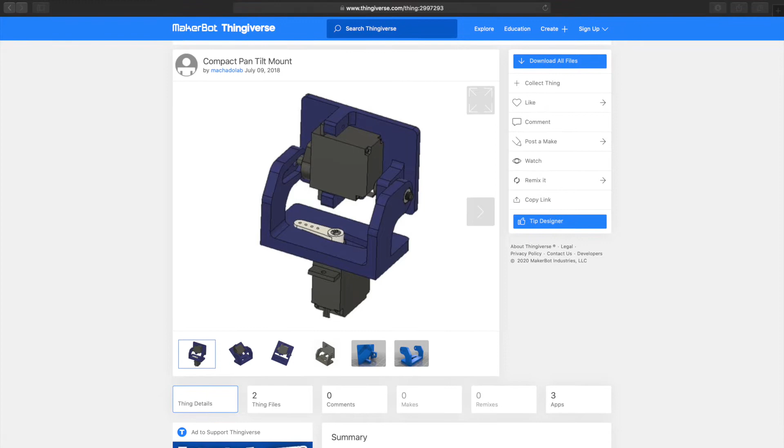I did a lot of searching through the Thingiverse database, and I found this particular design that I really liked. It's just two pieces, and the servos mount directly to the pieces without the need of a lot of extra hardware, just one other screw needed to stabilize the motion of the tilt.

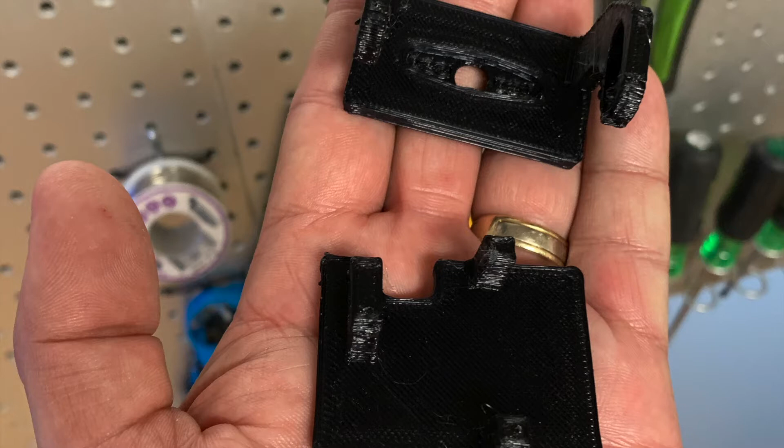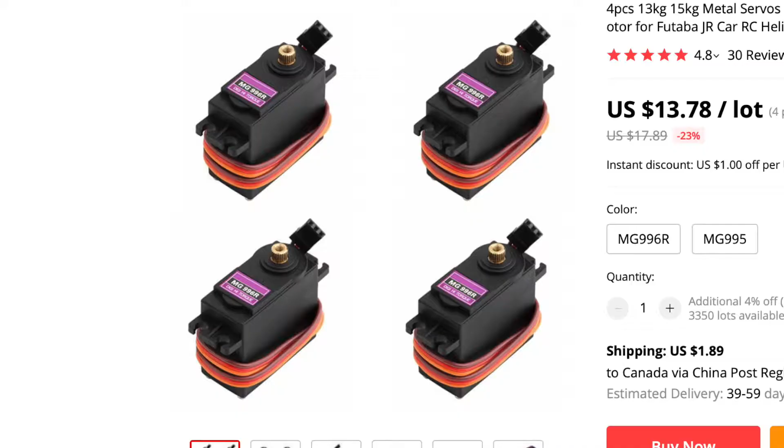And so I did print out that model and found that it's very, very tiny. Both pieces together fit inside the palm of my hand, and they use the smallest possible servo, which I was concerned wouldn't be enough for the weight and torque requirements of the camera. Instead, I wanted to use these larger servos.

These are MG996Rs. I'll include a link in the description, and they were quite a bit bigger. Of course, I couldn't just scale them because they're not proportional with the smaller servos. I couldn't just scale them by making the pieces bigger, and so I needed to remodel based on the design that I found on Thingiverse.

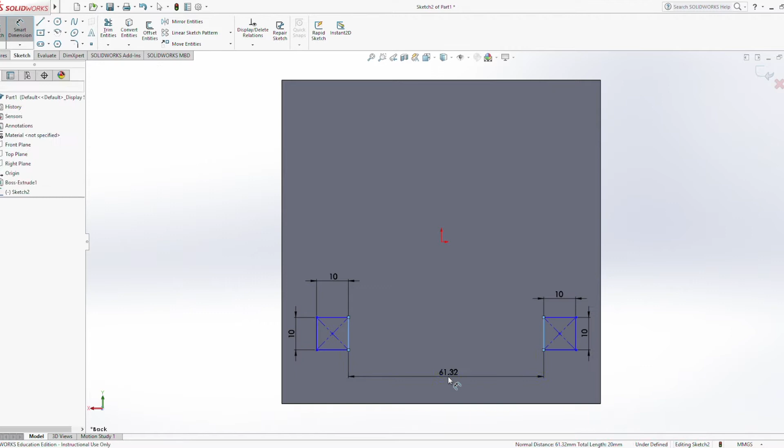I used SolidWorks to model the design, and I started with the top plate, which is going to be where the camera mounts directly. This is the underside of the plate, and I decided to make the plate about 100 millimeters square, and then following the same kind of design as that original, created the mounting posts so that the servo can mount directly to that.

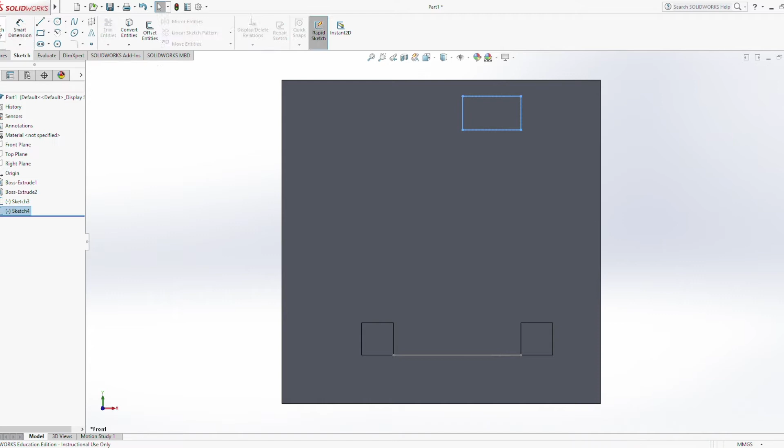Now I already had the servos at this point, so I used my calipers and measured the basic size of them. But I also did find the same servo already modeled online, and I was able to download that and import it into SolidWorks in order to use the dimensions from the model.

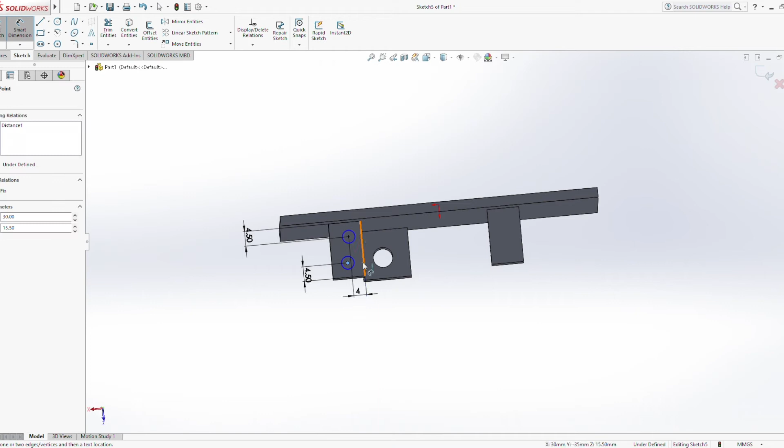Now, when I first started out, having not used SolidWorks a whole lot, I just went back and forth between the windows for the servo model and my own model. But later I found it's actually much easier to use the assembly window to put both the models on the same screen and then use them directly instead.

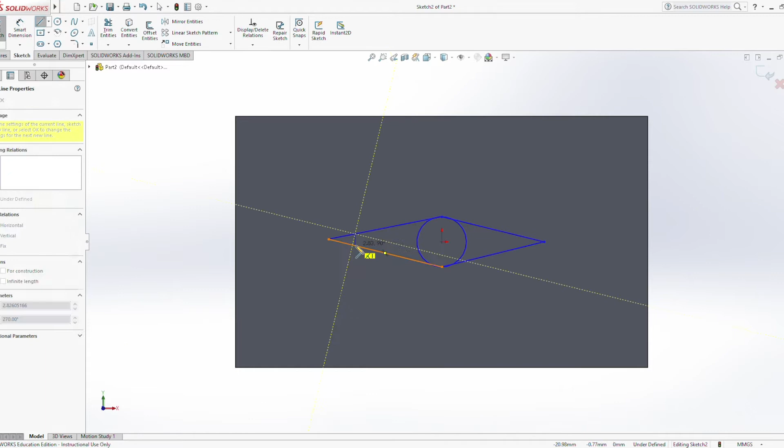Once I had the top plate all dimensioned out and created, I shifted my focus to the bottom, and this is going to be where the side rails are, as well as the swivel for the pan action. Now, I started by modeling the hole here for how I wanted the servo horn to fit in there.

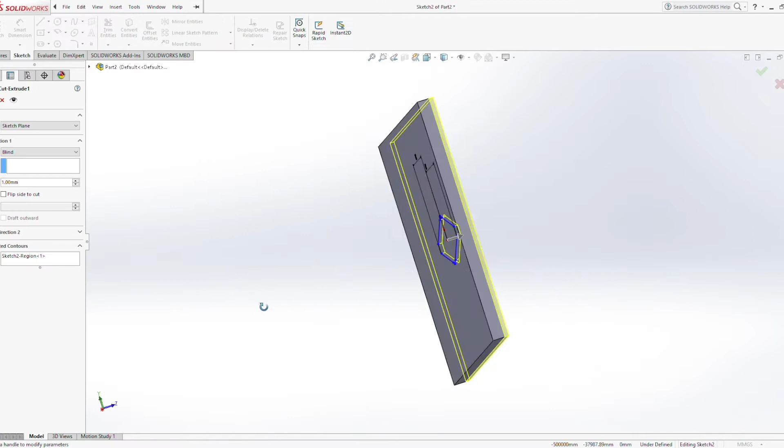I thought I would use the similar type design like they did in the original model, but I found that after playing with it quite a bit, I couldn't get the horn dimensions exactly that I wanted. And then I also found that there's a perfect nice round circle horn instead. After I spent all the time creating these longer arms, I instead created a model that used the round horn, which was much easier to dimension and make sure it was all correct.

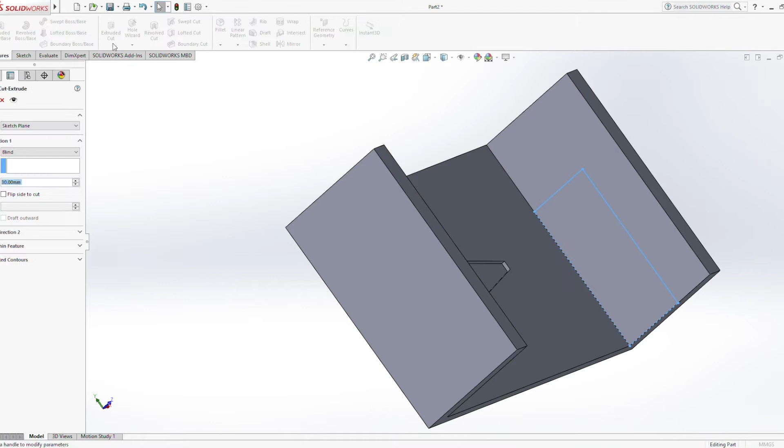On this screen recording, you can see I left it here as I go on to the rest of the model, but at the very end you can see that I did switch to that rounder horn instead. Now I'm creating those side rails or arms that are going to connect to the top plate and just designing them in such a way that the overhang as I 3D print them will be tolerable and it won't create any issues.

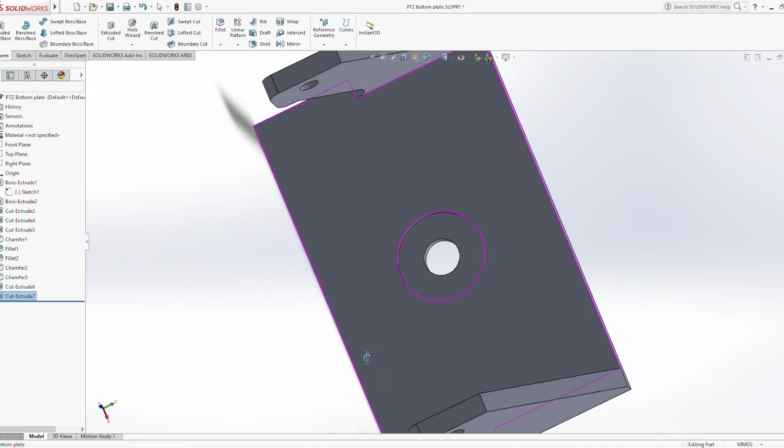As you can see, when I'm done, here's what it looks like with that horn being round instead of just the arms sticking out, and the whole model does work pretty well and fits really well with the top plate. Those being done, I sent them to the 3D printer, and a few hours later I had both the components and they fit really well together.

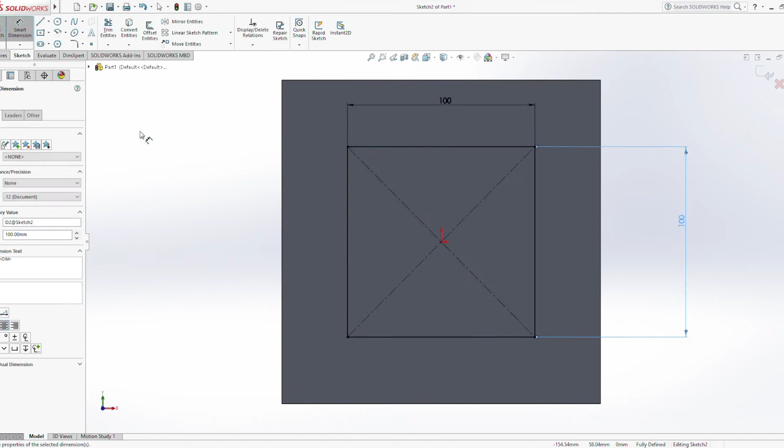Now as I shift my focus to the final piece, which is the base of the whole thing, I made great use at the beginning here of using the chamfer tool to create the angle so that it steps up in a bit of a pyramid and gives me the nice mounting base that I can secure for mounting the whole contraption, but also tapers to the size that I want, which is 100 millimeters square. And then I cut out the space that I need for the servo.

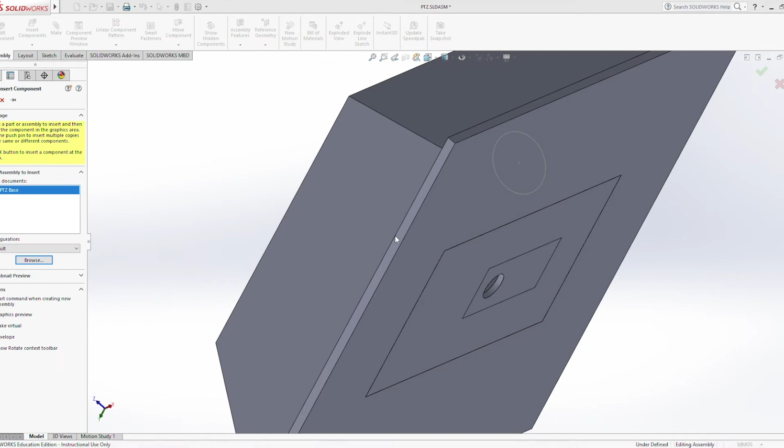Here's where I combined all of the components into an assembly, and you can see here once I did that, I was able to import both servos, the top plate, the bottom plate, and the base, and then create those relationships so that I could see how they all fit together and make sure that all the dimensions work properly.

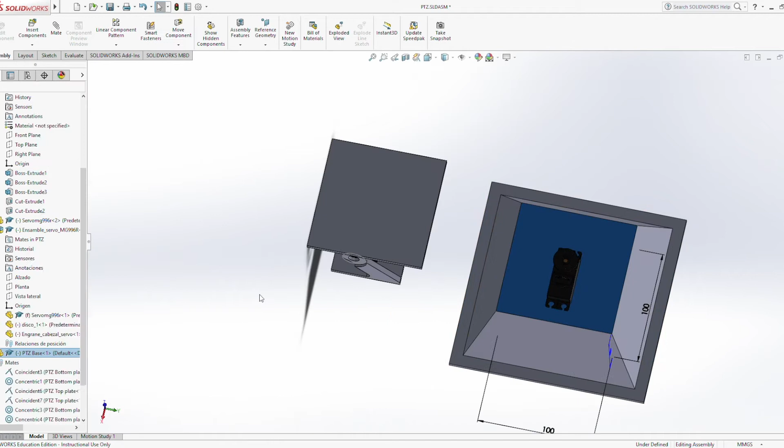The beautiful thing with this option is that you can edit the components individually from within the assembly window, which means that if the fit is not quite right, you can just double click, change up the dimensions on the sketch, and then rebuild the sketch so that all of the dimensions take effect and you can now work with those new and improved dimensions. When you go to save it, you just click the save command as you always would, and it asks you if you want to save all of the changes to those individual components as well.

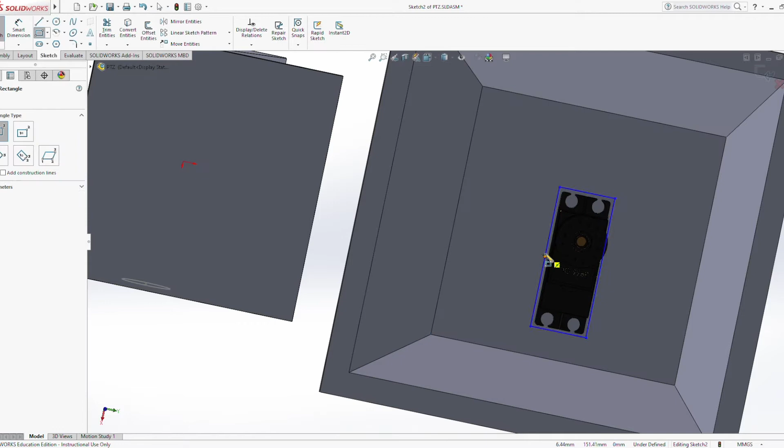This makes interactivity between the parts so much easier, and from now on when I design, especially when using more than one component or where I can find a model of a piece of electronics equipment, I'm going to definitely use this because it makes the process so much easier with much less switching between windows and also a much better fit in the end.

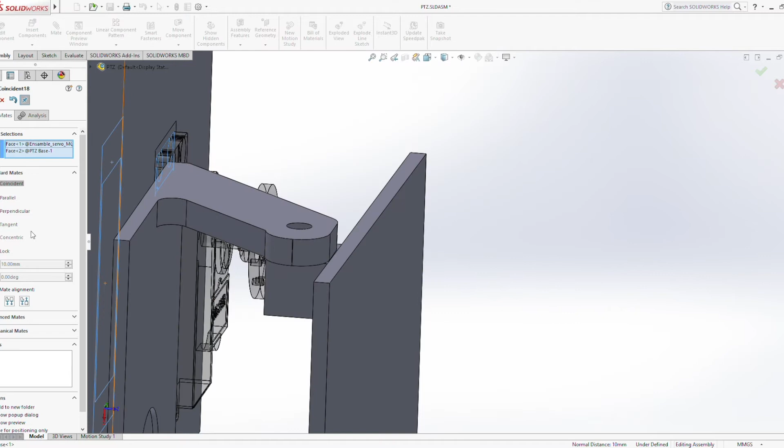Often if I'd try something like this from scratch, I would have to print out multiple copies of the model and keep tweaking it in order to get it right. But after I modeled all of this and made sure that it fit perfectly within the assembly screen, I was able to print it just one time and it all fit great together.

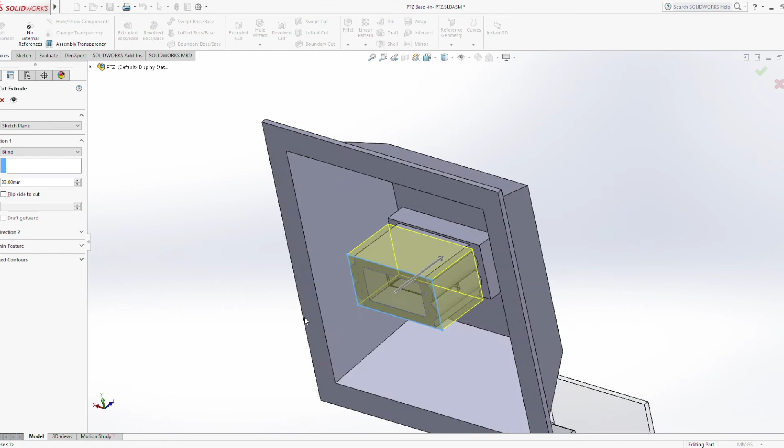Once I have everything cut out and lined up, I'm going to shell the inside of that base so that it leaves room to install the rest of the components and uses less material. And then I'm just simply going to fit it all together with relationships here to make sure that the center of the shaft lines up with the center of the hole on the next component and so on, so that we can establish the relationships for swiveling and make sure that they all work well.

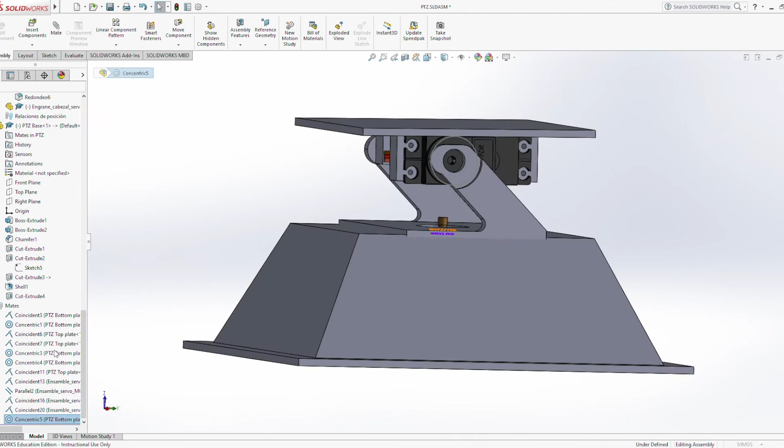As you can see here, once I have it set up, I have everything aligned so that if I were to move this base independently, it will actually swivel and maintain its position with the next component. And the way that I have the relationship defined, it does show that it can move up and down. Of course, the final model won't, but it gives you an idea that everything is lined up as it should.

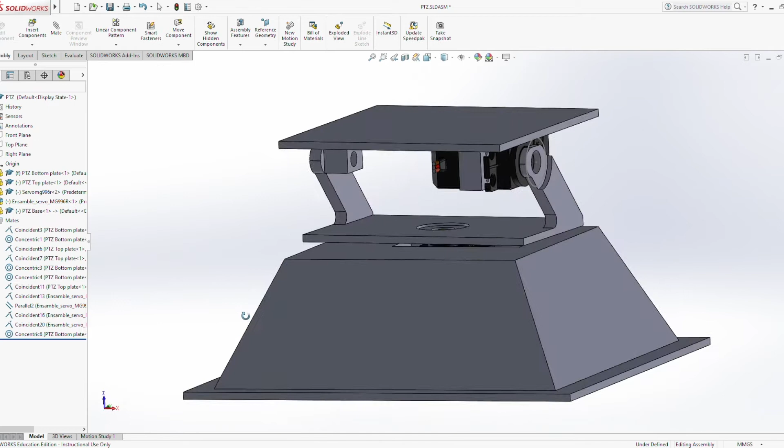Here's how the tilt is going to work, with the shaft of the servo and the screw on the other side going to hold it in place. And there's two components, both the pan and the tilt. It gives you the full description. You can test out if they're going to collide anywhere and make your adjustments as you need to, and it works great.

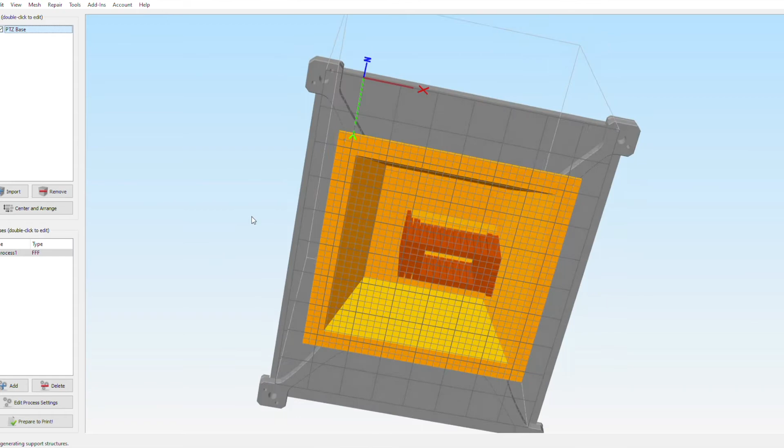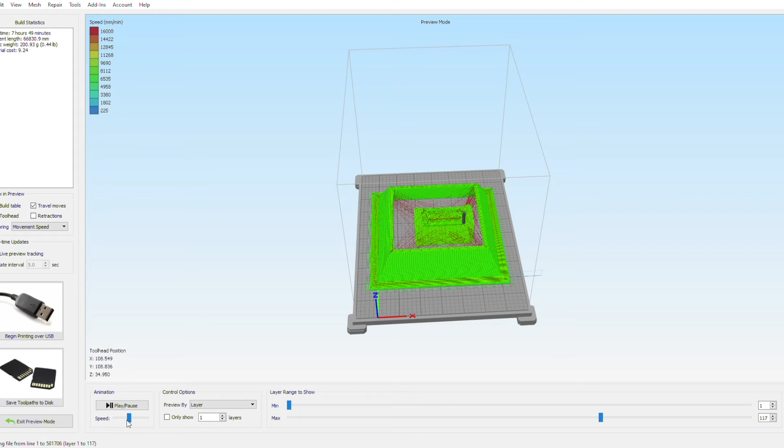I had to do something a little bit unusual for me as I did the base because it's hollow inside. It did require some support, which you can see in the darker orange color underneath, and that support is going to print so that the outer hole or the frame for that recessed servo is going to work just fine. I recessed the servo so that the top of it would be almost flush with the top of the base, which means that my components are going to fit closely together and will swivel with a lot of support for the model below. I printed that out. It took about 8 hours for the base, but it turned out great.

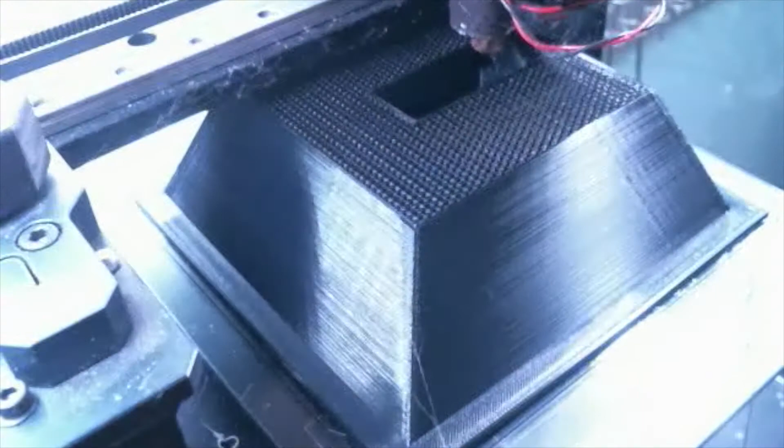Even without the support over the whole top, there's very little droop on the inside, as you can see here. There is a little bit on that first layer, but overall the support did its job perfectly. All the shapes and contours are visible, and the top surface of the base was perfect.

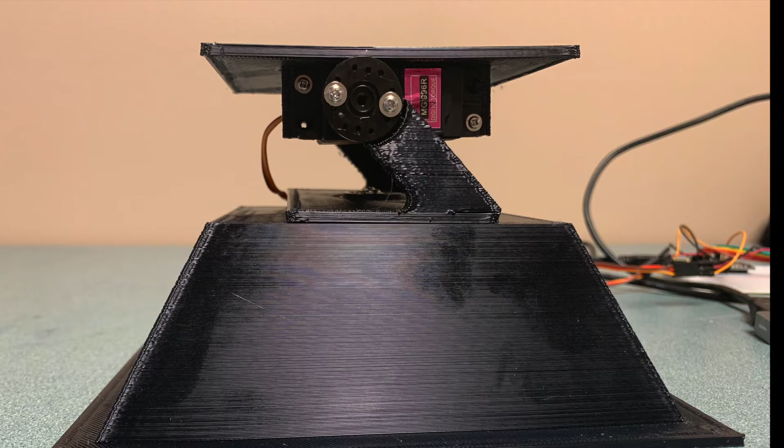I'm not going to show the assembly. It was pretty simple, but as you can see here, the servo shaft is holding one side of that tilt axis and secured with the horn, and the other side is secured by a simple machine screw and nut with some washers in between to reduce friction on the joint, and that's going to hold that axis for you.

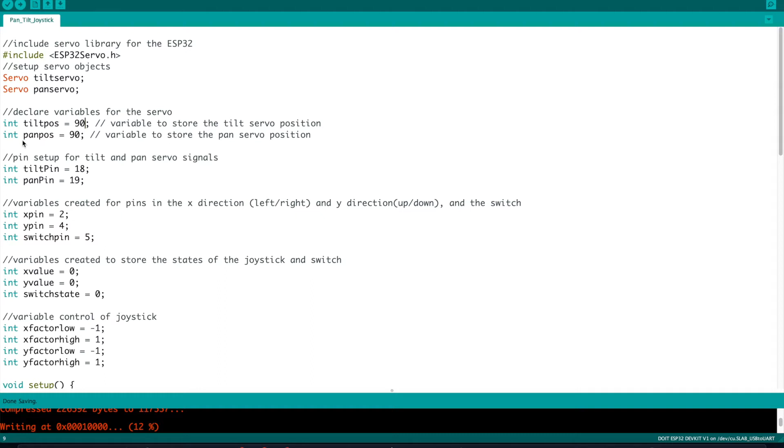The code is similar to what I've done before. If you've checked out the video on servo or joystick controls, we need to import that ESP32 servo library and then set two servo objects, a tilt servo and a pan servo instead of just the one we did before. And then I'm going to create some variables for the position of the tilt and the pan, and then declare the pins for the tilt and the pan.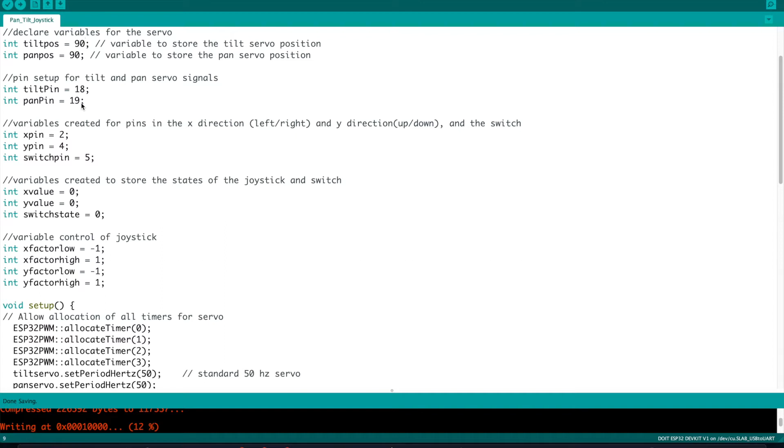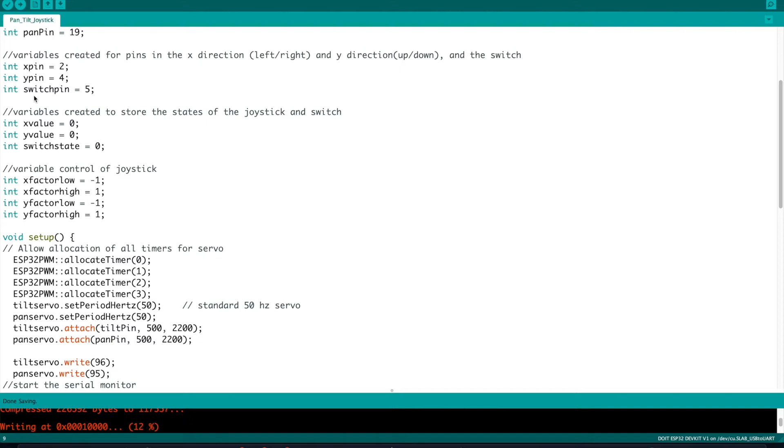In this case, I'm using pin 18 for the tilt, pin 19 for the pan, and 2, 4, and 5 for the joystick. As you can see here, the x-axis, the y-axis, and the switch. If you push down on the joystick, it does have a button or a momentary switch, and so that's defined there on pin 5. I need a variable to store the value of the x and y-axis, as well as the state of the button, so I declared those there.

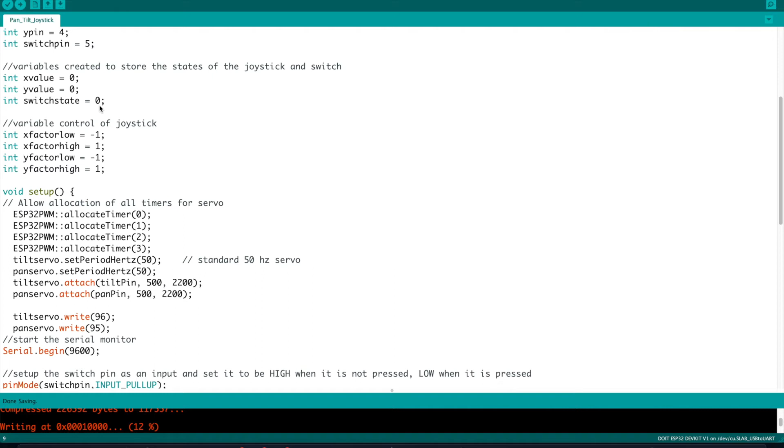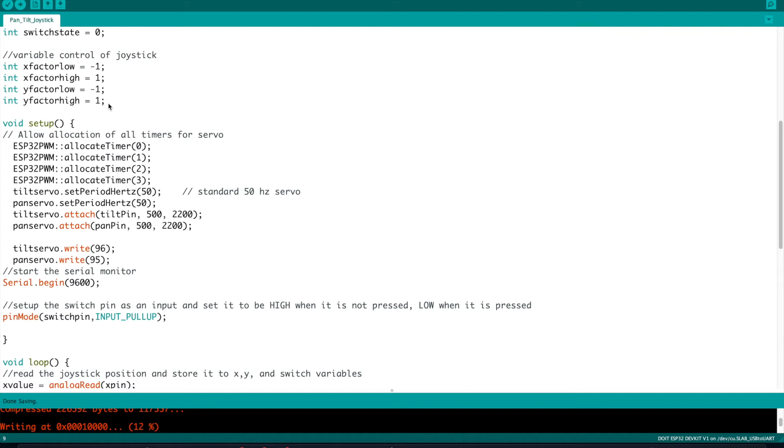And then finally, I have 4 more variables which hold a scaling factor that I use to multiply by how many degrees I want to change. So if I would like the joystick to have variable control, that's how I accomplish that there. These default timers are built in as part of the example. It's to set up the PWM or pulse width modulation, and the frequency is 50 Hertz, which is the basic standard for these types of servos.

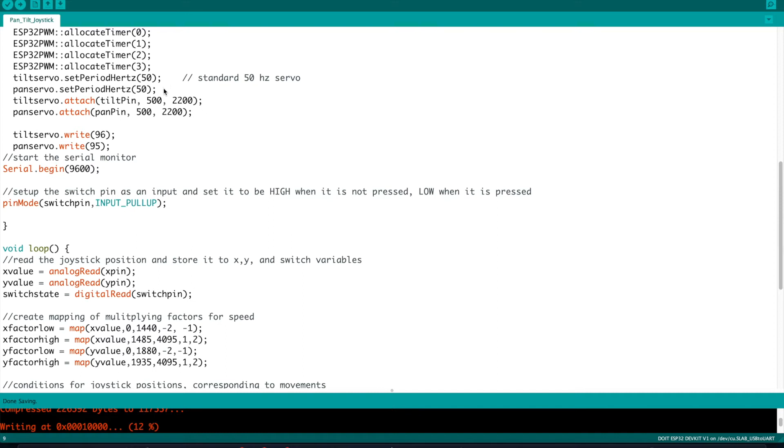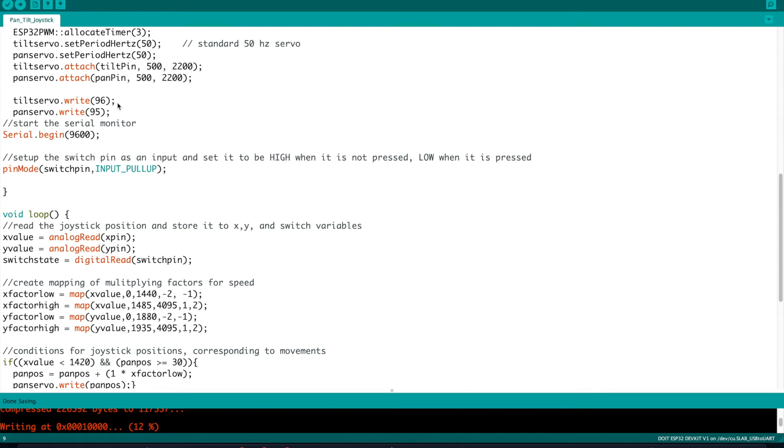I need to attach those servos to the particular pins and set the minimum and maximum PWM frequencies, and then I need to use the write command to set some default values so that under the setup function, it's going to create a default position. I originally set both of these values at 90, which is the center point of the servo, and then with them held at 90, I assembled the mechanism so that I could have everything in its midpoint.

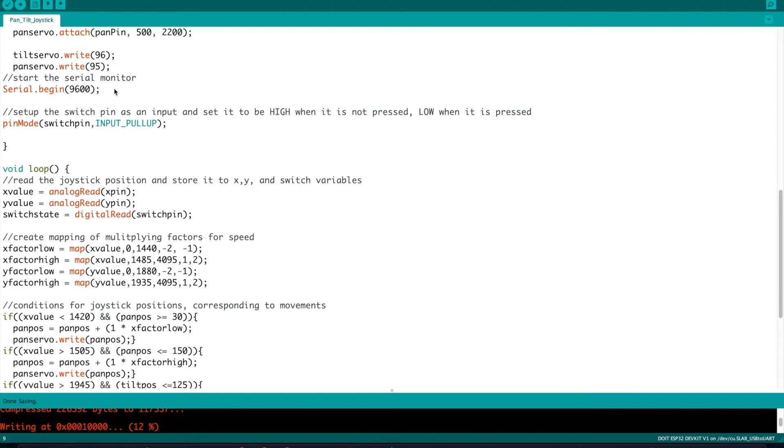I put it all together, and then when I ran it, I found out that after aligning for the shaft of the servo, they were slightly out, and so I made my adjustments to 96 and 95 respectively for the tilt and pan in order to get them completely centered where I wanted them. In the loop function, I'm going to read the X and Y values of the joystick and also whether or not that button is being pushed.

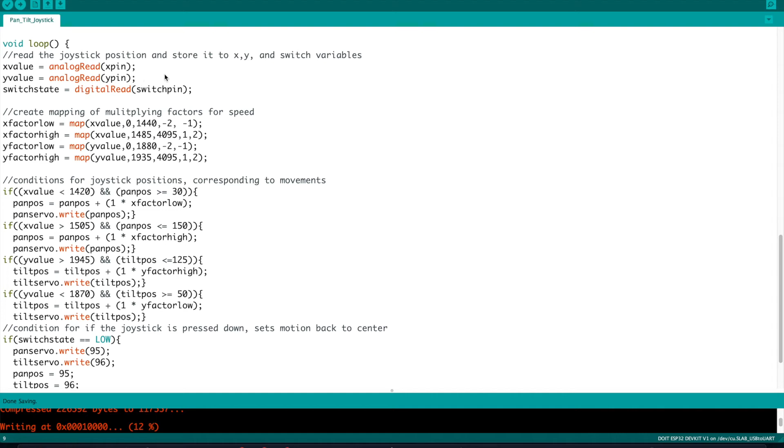And then I'm going to map all of the scaling factors here so that they work properly, increasing or decreasing the speed. And I'm just going to go slow or fast, 1 times a degree or 2 times a degree in order to have a little bit of variability, but not too much. If you watch the video that I did on joysticks, you'll see how to set up all of these parameters because you basically get values from 0 to 4095 and you need to scale them properly in order to match the position of the joystick to what signal the Arduino is recognizing.

All of those factors have been detailed in the previous video, so I'm not going to go over them here. If you need to refer to that, I'll have a link in the description below.

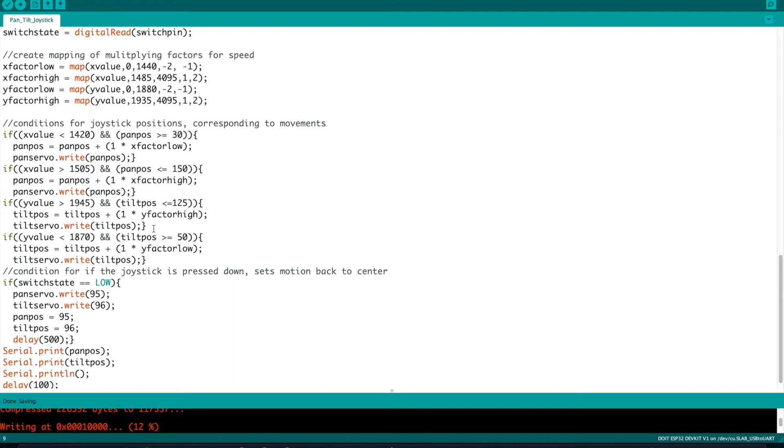Finally, I'm going to add one more condition which checks the state of the push button on the joystick. If it does detect that the button has been pushed, it's going to return the pan tilt mechanism to its default position, which should be nice and centered. I did choose to print out a few commands to the serial monitor, which helped me to determine the minimums and maximums that I wanted to use based on how much travel I wanted it to have on the pan and also the limitations for the travel on the tilt.

If you don't put those kind of limitations in, or if you don't check carefully enough, you can cause the mechanism to turn farther than it should, and you can cause damage to the 3D printed parts or the servos themselves. Finally, you can adjust the delay to get the basic speed of the movement.

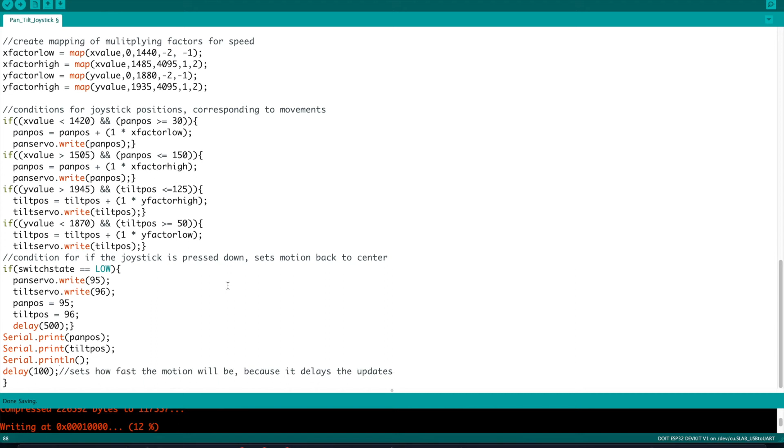If you put something as little as 15 milliseconds, you're going to get some very fast movement and a very quick response, but that's also going to look very jerky if you do hook up a camera to it. If you increase that, here I've used 100 as what I think will be a great speed. Here's what 15 looks like. It's very fast, very responsive, but you can also imagine your head spinning as you are watching the video created by this. And then, of course, if you press the joystick button, it resets the center position.

By comparison, here's what it looks like for 50 milliseconds in that delay, which is a much slower, much more controlled movement, and it feels not quite as jerky or disorienting. Once again, if you push the joystick button, it will return to the center position.

Finally, here's what 100 millisecond delay looks like. And as I said, this is the one that I anticipate using for now. Until I see the actual camera installed, I might change it up. But for now, this is what I think will be smooth and comfortable motion for most people to watch.

If you go too slow or add too much delay, you're going to get jerky motion because the servo will have time to come to a complete stop before it moves to the next position. And 100 milliseconds feels like it's right on the edge of that. If you go too much slower, you're going to see that hesitation.

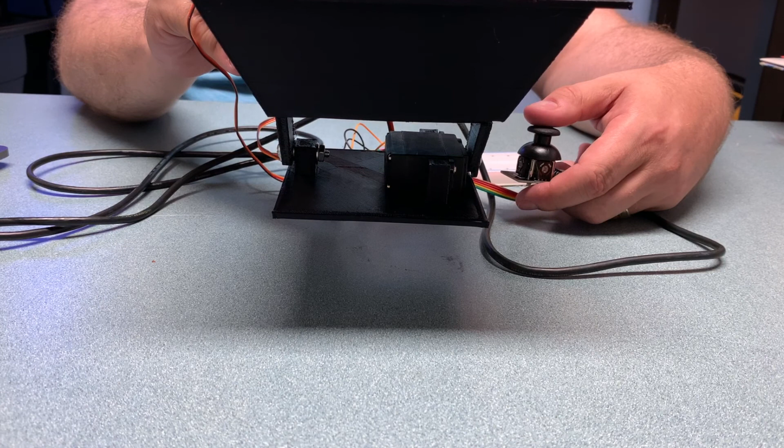When I install this, it's probably actually going to be upside down, mounted to the ceiling. And so as you can see here, if you turn it upside down and flip your joystick around, all of the directions still work perfectly, and it's just going to work the same way, but of course your directions just being switched. Pushing down on the joystick, again, returns it to center. I really like that feature, although I'll probably add some speed controls so that it does it a little bit slower in my final product.

And that's it. If you've been watching along week by week, you probably wondered if these servos were ever going to get anywhere, but now you can see they actually control something useful, and when combined together give us both the pan and tilt action for this camera project. I'm also going to be adding one more servo down the road that adjusts the zoom for the camera, but I don't have the camera yet. It's on order, and it's going to require a specific calibration and setup, and I don't know until I have it exactly how that's going to work.

My next video with the ESP32 is going to show off communication between 2 different microcontrollers so that I can use the joystick on one microcontroller and then wirelessly convey the servo position to another microcontroller where the camera is located. I've got a bunch of other features in mind for this project, including some buttons that will store positions of the camera, and then when you press them, will simply return to those stored positions.

So if you've ever wanted to build one of these pan and tilt mechanisms, and you want to see the added features as they come, just keep checking back. I might not post one of those videos every week, but as I get through the project, I'll post more and more until the final project is complete.